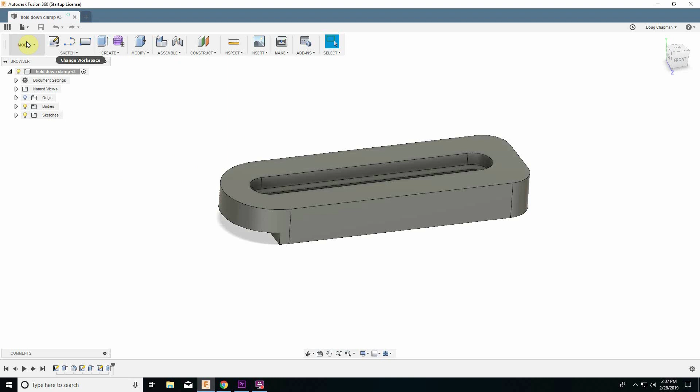So we have the 3D model, but in order to actually turn this into a real part, we need to generate the CAM toolpaths. We can do all this in Fusion 360. We did all the drawing in the model workspace, so now we want to change to manufacture. Older versions of Fusion 360 called this CAM. They've renamed it to manufacture, but it's the same thing on both.

First thing we need to do is a setup, and the setup is what sets our orientation of the part, so how it's going to be placed on the CNC table, essentially.

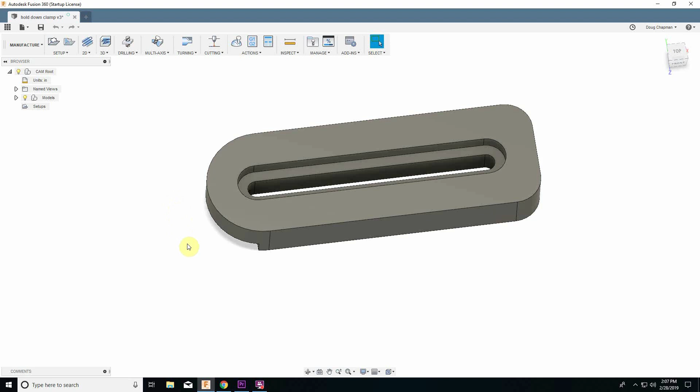As I mentioned before, part of why I chose this design for a demo is it's got the extra challenge of having to do things on two different sides. On this side, we have this recess, which is for the head of the hold down bolt. On the bottom, we have this lip, which is used for where we clamp down onto a part. So we need to do one setup with the part flipped like this, and then we'll do the finishing with it like this.

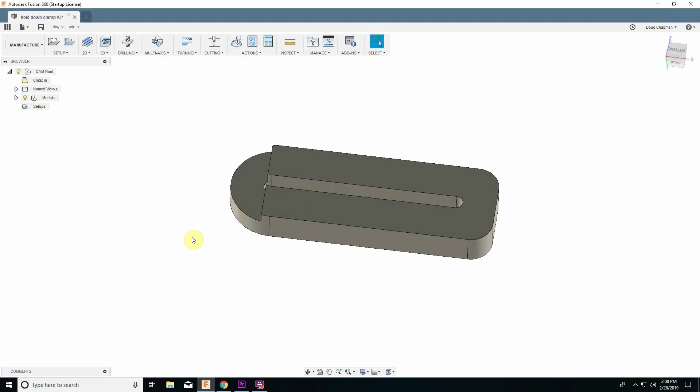So let's go ahead and do our first setup. We go setup, new setup, and the first thing we need to do is define the orientation.

So we've got our X, Y, and Z. Here you can see the Z is coming towards us. Z is up and down on the router, so that's not what we want. There's a couple different ways you can specify this, but what I usually go for, the option I find works easiest, is select X and Y axis.

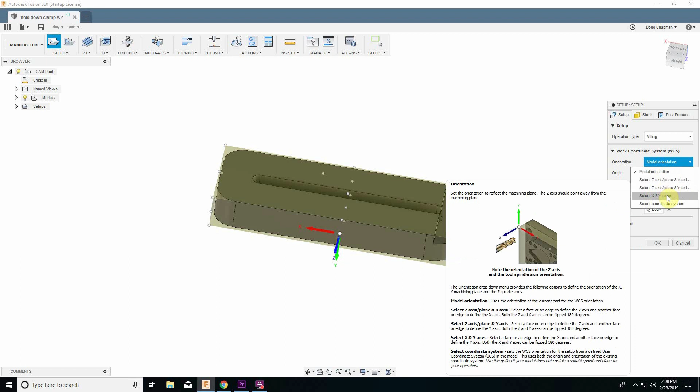Let's do that. It's asking us for the X axis, and the X axis is actually correct here. Actually, I'm going to turn it around this way just so we can see that change. Let's select this for our X, and then for the Y, we'll select this line. So now we have the X going left and right, the Y going away from us, the Z going up and down, which is what we want.

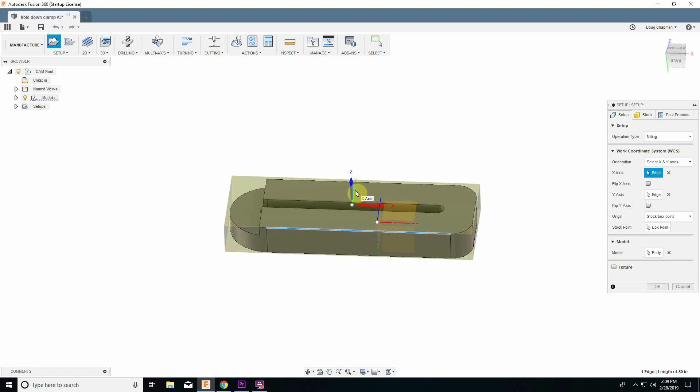Now we need to make sure we have a way we can zero this on the machine. By default, it chooses the top center as the origin point. We need something we can reference off of from our blank piece of stock. So let's click box point here, and you can see that it gives us options for bottom, middle, and top of any corner and along any side.

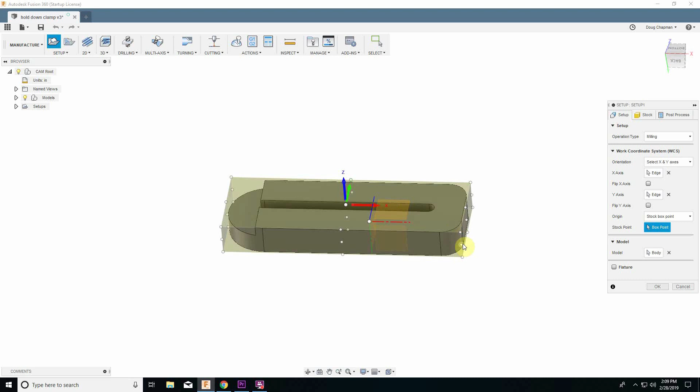So I'm going to select this lower right corner for this one, and you'll see why. Normally I use the lower left corner, but when we flip it, we'll end up using that, and you'll understand why when we do the second setup.

Now the other thing we need to do is, right now Fusion 360 tries to guess how much extra stock you're going to use, and by default it does 40 thousandths. It assumes you're going to cut this out of something that's 40 thousandths bigger on the side and on the top. What I prefer to do is, since we're doing this out of plywood and I need a way to

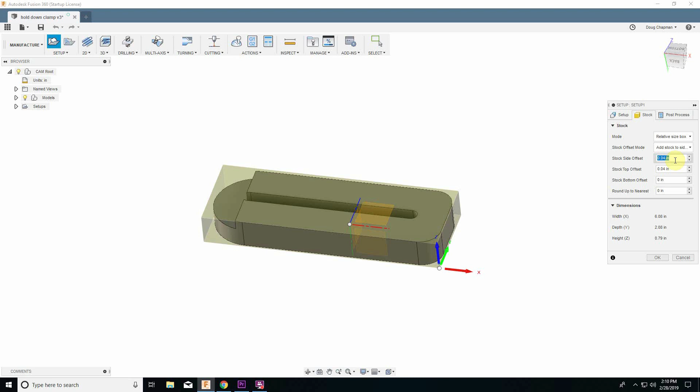clamp the piece down, I do 1 extra inch on the side, and we're going to use stock that's the same thickness of what we want to make, so we're going to set that to 0 for the stock. You'll see that this box, the shaded box, which is the piece that we're cutting it out of, is larger. So we can click OK there.

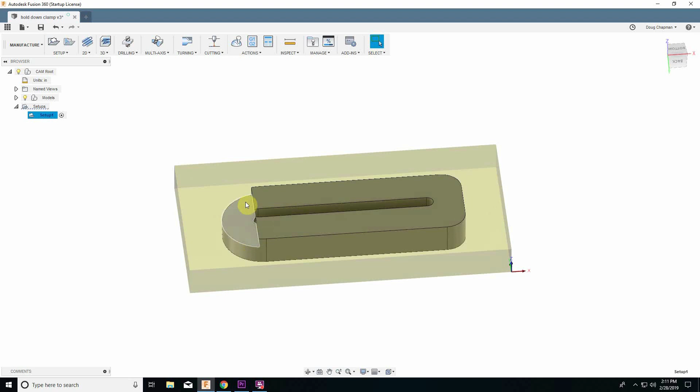Now we need to do an operation, and for this side, the only thing we really care about is cutting this piece out here. So for that, we can do a 2D pocket. First thing we need to do is we need a tool.

Right now, I'm going to assume this is your first time using this and you haven't defined any tools. I have some tools defined in my library, but it's easy enough to add one in. I'll show you how you can do that. We're going to do all these operations with a 1/4 inch spiral router bit. You can see we have various types of tools, and so first we want a milling tool.

So starting with these tabs, on the first tab you can just add some general information. These are really just notes for you. You can have things like the link to where you bought it if you need to order more of them. I tend to leave those just blank. For the cutter, this is the important stuff that you do need to define.

So we need the type of a cutter, and we're using a flat-ended end mill. It's a 2 flute, and it's less critical to enter these, but I'm going to go ahead and do this. It's a carbide, no coolant, and here's the important stuff: the actual diameters and sizes. So we're doing a 1/4 inch, which is 0.25 inches.

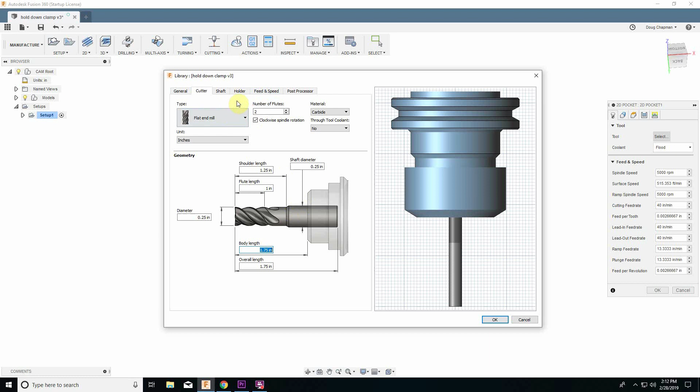The other thing that is useful on these tabs is the feed and speeds. You can define these when you actually use the tool, but here we can set some defaults. Fusion 360 does some really useful things where, especially if you have a spindle where you can control the speed through the CNC software, you can specify what speed you want and how much of a bite you want it to take for each tooth, and it'll calculate these feed rates. I'm using a normal router, so I don't have any control over it, and for doing just a simple router, you're best off just setting the feed rates.

What I find works well, and this is something you really need to experiment with your setup to see what works well, but 80 inches per minute for this cutter tends to work fairly well. So we'll do cutting, lead in, lead out - I'm going to leave those the same. The ramp by default is different, but when you're ramping in, it is good to move it a little bit slower, so I'm going to set that at 60. Once again, you can experiment with these and see what works well for you.

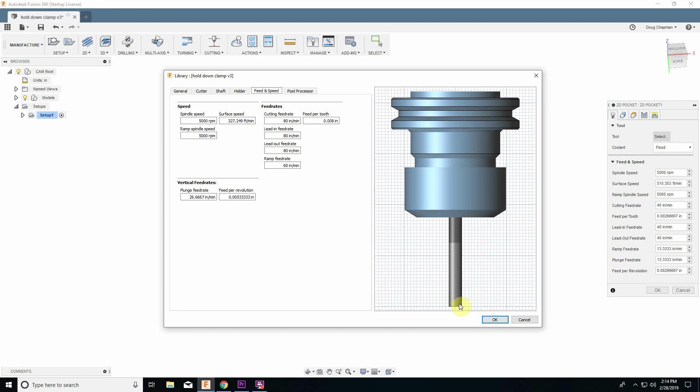But that's all we need to do to define a tool. You can see here now we have this 1/4 inch - it gave it tool number 1, 1/4 inch flat, and it gives some of the details on it. So we can click OK, and you see that that's the tool we're using here. Also, all those feeds and speeds, it'll set those values in here, so if you wanted to override them for a certain operation when you use a tool, you can define that here.

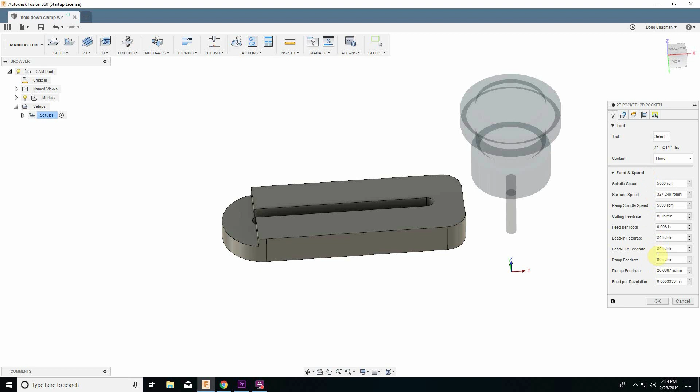So now it needs to know what are we going to cut. We're doing a 2D pocket, so we just need to define the area that we're cutting. In this case, all we care about is cutting this little lip area here, so we can select that, and it knows that's where we want to cut.

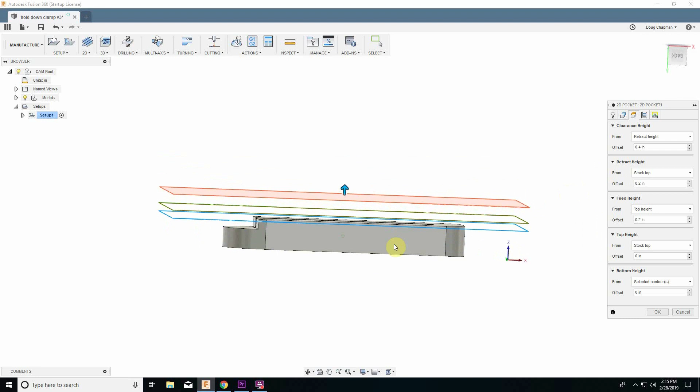For the heights, this isn't too critical, but it just shows us what we have. First of all, we have a bottom height, which is the bottom of the cut. In this case, it's not going to really show up on the diagram here because it's just selected contours, and we selected this, so this is going to be the bottom. The top height, the top of the area you're cutting, is just equal to the stock top. The feed height, which is where it's going to begin ramping in, is going to be another 2/10 of an inch, or 200 thousandths, above that.

The retract height, which probably should be what we want to do, is we want to do this from the feed height. So retract, meaning when it's going to move, it's going to pull it up to that height, and you can see the line there. Then the clearance height, which is when it does larger moves - it's a little difficult to understand exactly when it does the retract height versus the clearance height. It really comes down to how far it's moving, but you set this a little bit higher yet so that you can clear things like other clamps that are holding down the stock.

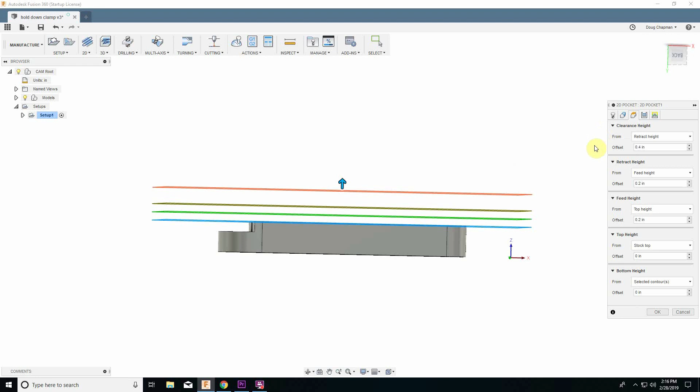Now, for passes, we don't really need to worry too much for this one - this is a fairly shallow cut, so I'm not too worried about doing this. We can do this in one operation. It's about 1/4 of an inch, and it's a 1/4 inch diameter tool, so we should be okay there. But if we did want to do that in multiple passes, we could use this multiple depths tab, and I'll show you that when we do the thing on the other side, so we'll leave that.

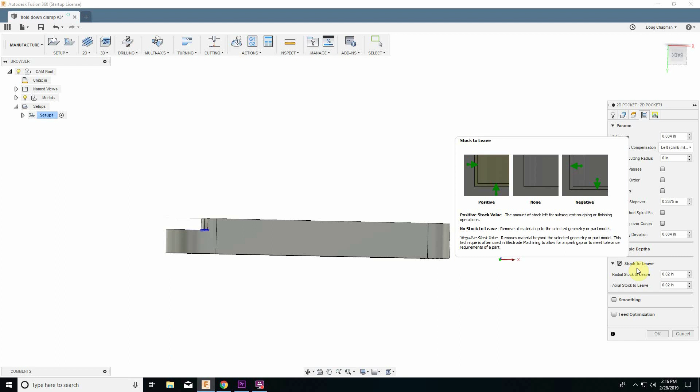Now the other thing is, by default, it's trying to do a stock to leave. The 2D pocket, and also 2D adaptive, or same thing with 3D - the adaptive and the pocket operations are not intended to be extremely precise operations. They're intended to remove the bulk of the stock, and if you're doing something where you need the part to be very precise, what you do is you leave a little bit of stock here.

Here you can see it's leaving 20 thousandths of an inch, both radially, meaning around the outside of the tool, and axially, meaning along the end of the tool. So it would leave a little bit of stock, and then you would do another contour operation, which is much more precise, to remove just that little bit that's left.

We're not worried about this being that precise, so I'm going to leave that unchecked so we don't need to do that extra operation. And then on linking, about the only thing I care about changing for this operation is this 2-degree helix, which is a little shallow. For plywood, I tend to make that 10 degrees.

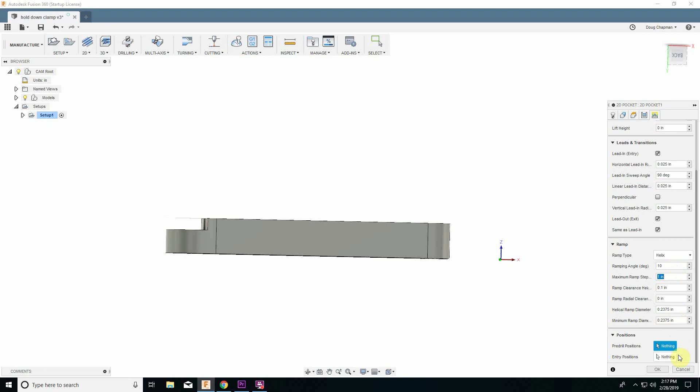If we click OK here, you can see that it did our tool path. This blue line is when it's actually cutting, and it'll remove all the area that is this lip. So that's all we need to do for the first setup.

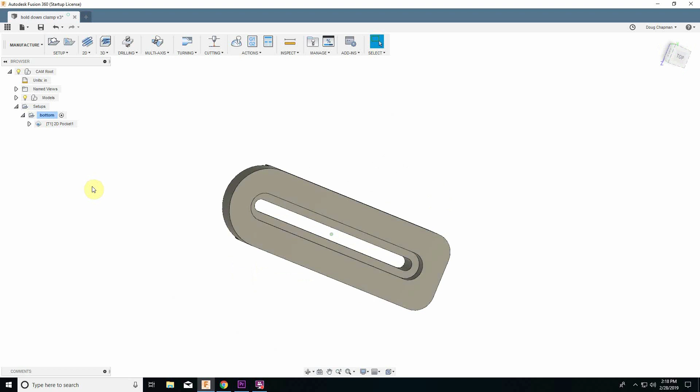Now, just to keep things straight, I'm going to rename this setup to be 'bottom,' just to give it a name. And now what we need to do is flip it upside down and do the top side.

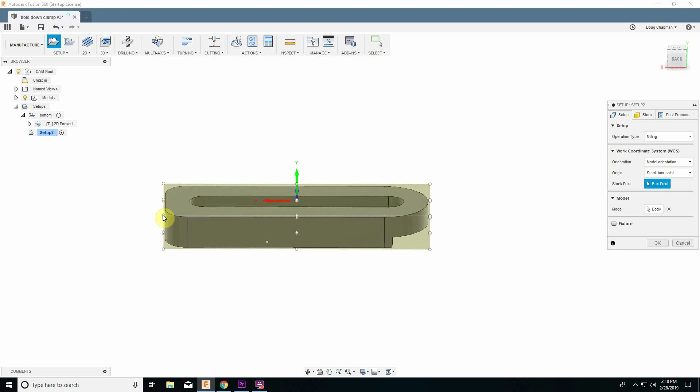First, let's remember that we used the lower right-hand corner for our zero point on this operation. We need to remember that because when we do our new setup, we're going to flip it over. So now that corner is over here, and I still want to do it along the bottom, so I'm going to go ahead and select that origin point right here.

Now our X, Y, and Z are still not correct, so just like we did before, I'm going to select X and Y. We want this to be our X and this to be our Y. And frustratingly, it always moves the origin around, so you really need to save that for last. Let's reselect our origin.

Now our Z is upside down. X and Y are in the right plane, but notice how the Y is pointing towards us, not away from us, and because of that, it's causing the Z to point down instead of up. So to fix that, we can just flip the Y-axis, which moves the origin again. I still find that rather frustrating, so let's move it back to where we want.

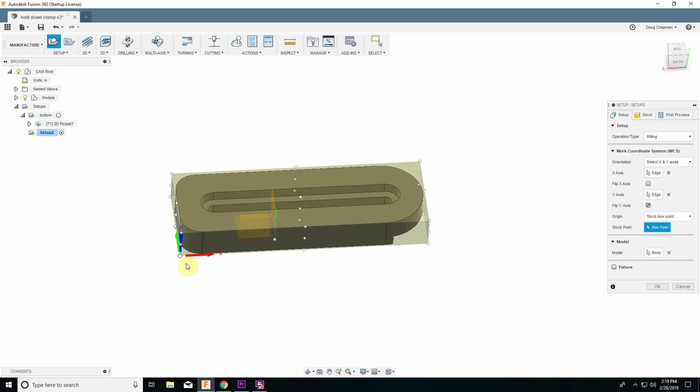But now we've got what we want: X going left and right, Y pointing away from us, and Z pointing straight up.

The other thing we need to make sure is consistent across our two setups is the amount of side offset that we had. We had 1 inch before, we still need that now, and we're going to do 0 on the top.

Now, I didn't talk much about why I chose the bottom corner rather than the top corner, and different people prefer to do this different ways. I've found that this works better for me.

What I can do is zero out my Z height on the router as being right at the table, and then when I do the cutout, I know, even if I haven't measured the thickness of the stock quite correctly, I'm not going to gouge into the table, and I'm going to cut all the way through the part properly. So that works well for me.

So earlier we did a 2D contour on the bottom. We're going to do the same thing, or sorry, not contour, the 2D pocket. On this one, since we have a more complex shape, I'm going to change that to a 3D. It's hard to explain exactly the difference between the 2D and 3D operations, but essentially a 2D operation is a much more simplistic algorithm where you just give it the area and the depth you want it to cut, and it essentially does things along one plane.

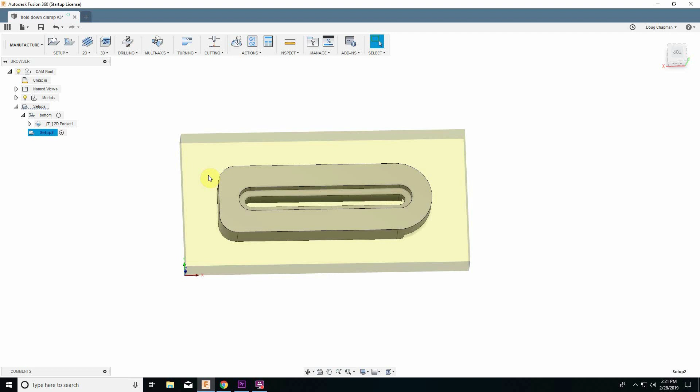What we care about here is doing this recess and the inner slot in one operation. So if we do a 3D pocket, once again we want to verify we have the right tool, and we're going to do this all with that 1/4 inch end mill, so that is correct. We're not going to change any of our feeds and speeds.

Now here, we do need to change it. If we don't set any of the geometry, it's going to try to do everything it can in one operation, which would mean removing all the stock around the outside, that extra inch all the way around. It would mill all of that away and probably try to face off the top to flatten it, which we don't need because we're already using a flat piece of plywood, and then it would do the inner part.

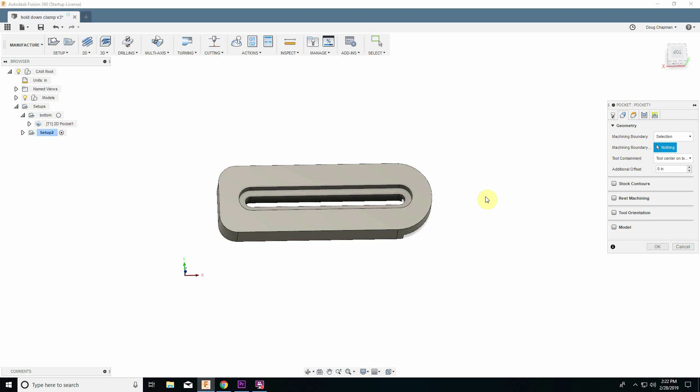What we care about is just that inner part. So we can go selection for the machining boundary, and we can just select this oval, and we want tool center either on or outside. If we do tool center inside boundary, it tends to not actually get the whole thing. But if we do tool center on boundary, meaning never let the tool go any farther than the center on that boundary, that should get everything we want.

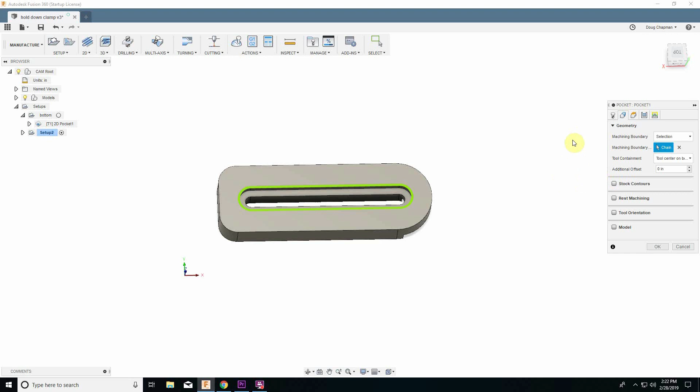And we'll check the tool paths before we finish up here. Once again on the heights, now we'll see something a little different than we saw with the 2D. On this one, it does know where the bottom is, because we didn't just select a contour for it to cut. We're actually saying don't cut anything below this. And so any place within that area that it can cut all the way to the bottom, it will.

And we're going to do the same thing for all of the other clearance heights. Except for I wanted this. Yeah, no, this is correct.

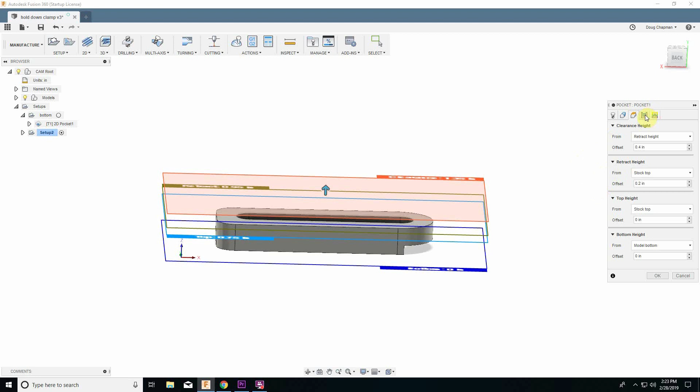And once again, for passes, we don't want to leave any stock because we don't need this to be super precise. So I'm going to uncheck that again.

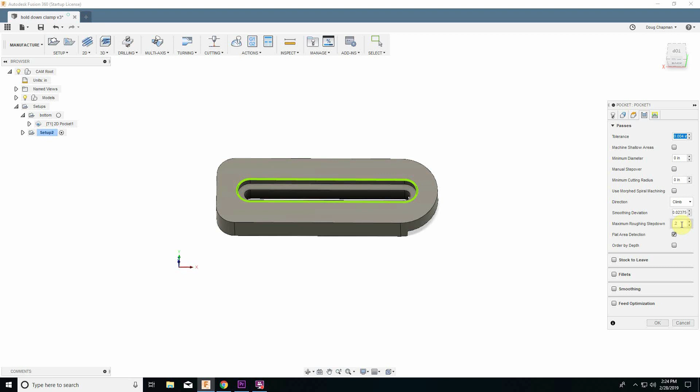But now we don't want it to try to do this full depth as one cut. So I am going to go here in the passes, and we are going to say here where it says maximum roughing step down. By default, it's 40 thousandths. That's really based more on doing things in metal for these defaults. So a good guideline, especially when doing wood, and really for most things, is you never want to cut any more depth than 1 time the diameter of the tool. So this is a 1/4 inch tool. I'm going to be a little bit conservative and just do 0.2 inches for the maximum roughing step down. So that should be a pretty good, fairly conservative depth to cut.

Now once again on the ramp, I'm going to change this to 10 degrees, and the rest of this should be good. So now we'll get a little more complex tool path on this because we're doing a more complex operation. So let's take a closer look at this.

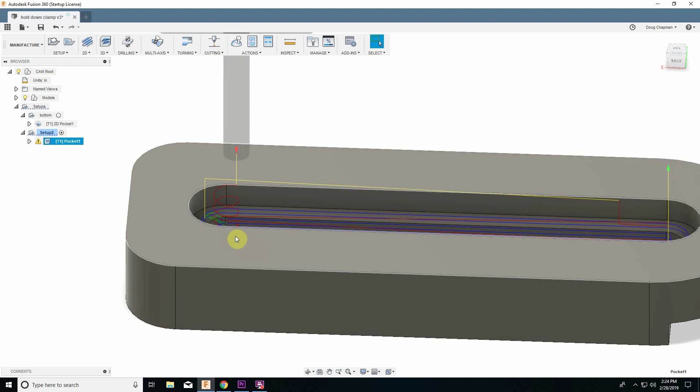First of all, you can see this. You can see it helixing down. The reason it does that rather than plunging is router bits and end mills tend to cut better on the edge and don't cut really well in the center. So by doing this, you're not relying on the center of the tool to cut, because it's a router bit. It's not a drill bit. It's not really intended to just plunge straight down.

So it does this circular motion to get down there, and then it does some. You can see it clearing out this upper area here. And if we flip it around to the bottom, you can see that that tool path then gets a little narrower and goes all the way to the bottom. So that looks like it's going to do what we want.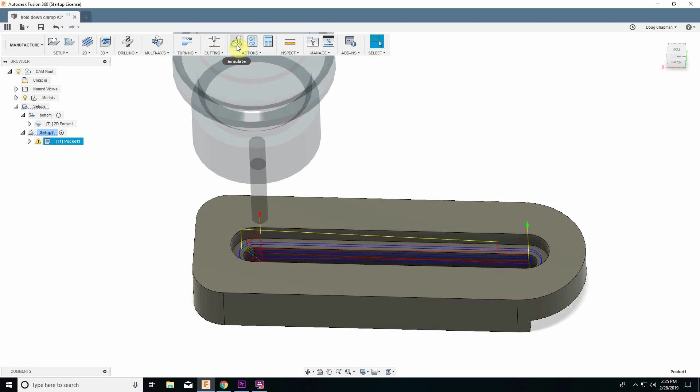But just to be sure, what we can do is we can simulate this. So the simulate button, and what we want to do is we want to turn on the stock button so we can see what it is we're cutting. And I'm actually going to turn off the tool path. But this will show us the actual operation in simulation of what it's going to do.

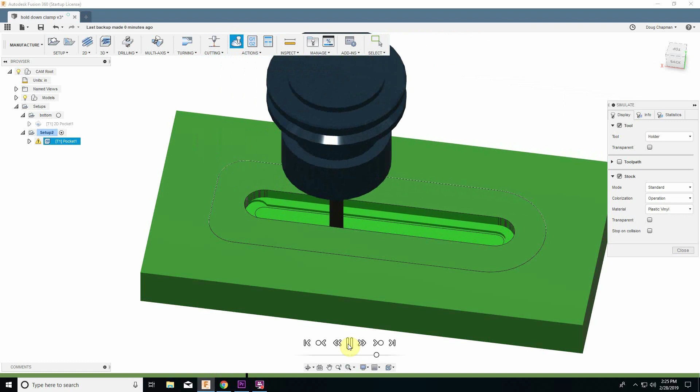So this is a useful thing to do. Make sure it looks like it's doing what you expected. A lot easier to fix it now than have it do something you really didn't want on the real part.

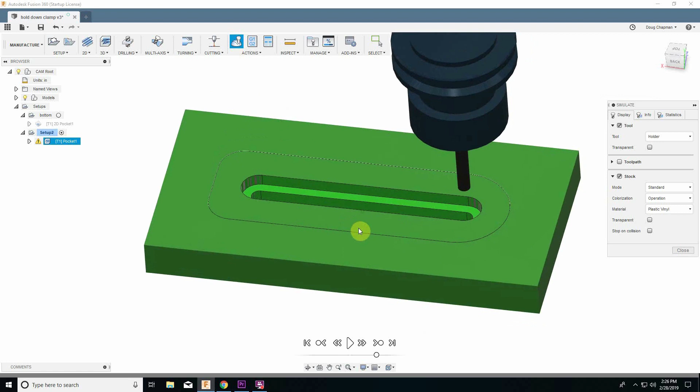And for this, once we think we're happy with what it's doing, we can click this button, which will jump clear to the end. And we can see what results. We see that it did cut all the way through. That's a useful thing. Sometimes if you don't have your height set up correctly, it won't cut all the way through. But that goes all the way through, and I think everything looks good. So I think that tool path is good.

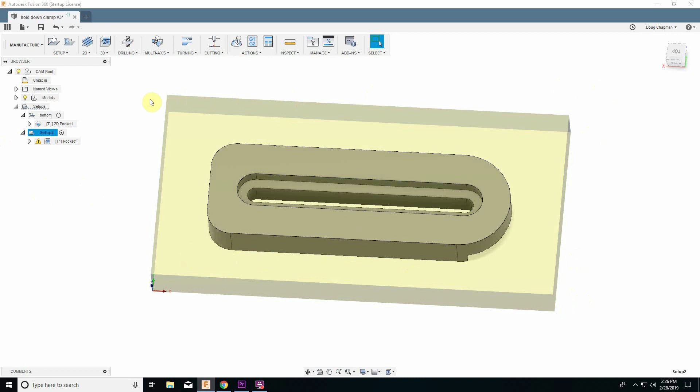So now the last thing we need to do is actually cut this out of the stock. As I mentioned, we could do something like that adaptive, that 3D adaptive would have done it, but it would have removed all of this stock. Of course, that would be a problem because ideally we've got this clamped down, around these outer edges. We've got something holding it down, so we can't just remove all that because we've got clamps in the way, and the part, once it broke free, it would just kind of go flying.

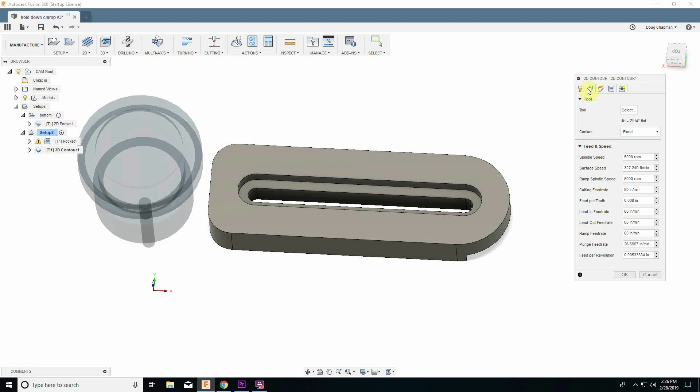So what we're going to do is we're going to actually cut this out, and to do that, we can do a 2D contour. And so what this is going to do, we've got a very similar dialogue here where we verify we've got the right tool. That's correct. And now for the geometry, what we want it to do is we want to tell it to cut along here along the bottom.

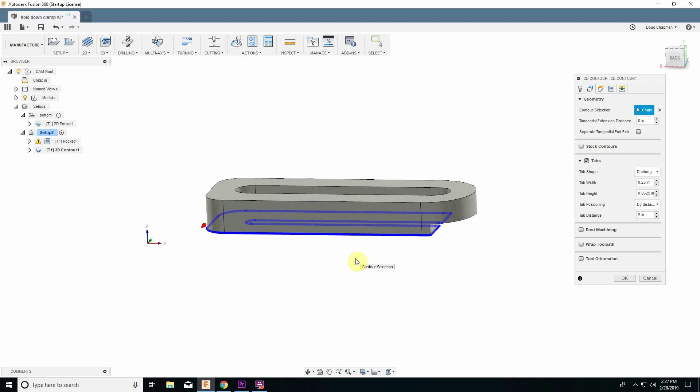Now, if we didn't have this notch here, we could just select this line. However, that line does not go around the whole thing, so that's not what we're going to want. And 2D paths are fairly dumb.

It will cut right through parts of your model if you tell it to do something like that. So instead, let's click on this oval, which gives us the shape but not the proper height or depth of where it's going to cut down to. We can fix that on our heights tab. The other thing we want to do is make sure that when it cuts through, this piece doesn't come free, so we can tell it to leave tabs.

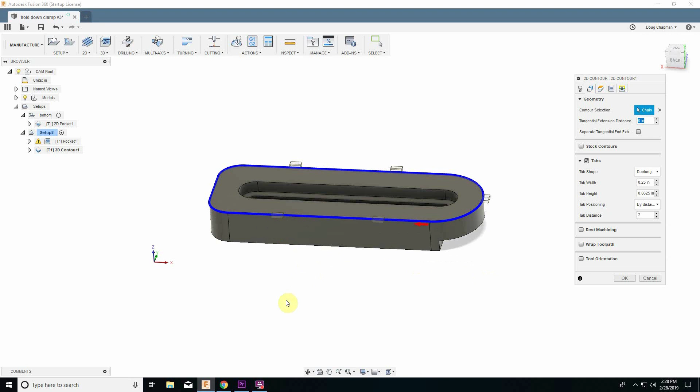I have this set from a previous job at 5 inches, but this piece is much smaller than that. So let's tell it to do every 2 inches. For now, ignore that it's putting the tabs on the top - that's because we haven't set the height yet, but you get an idea of where it's going to put them. It's going to put 2 tabs on each side, which should be good, and one here on the nose. When we move this line down to the bottom, that one isn't connected to anything, so it's not really useful, but these other 4 should be plenty.

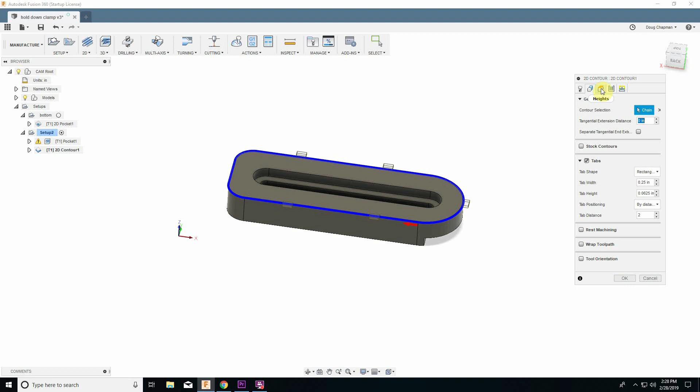So now on the heights - this is where, before when we did a 2D operation on our original operation, we just said the bottom height is the selected contours. If we do that now, this isn't going to cut anything. It's literally just going to follow around above here, cutting air and maybe slightly rubbing against the part, because this top part of the model is what we selected as our contour.

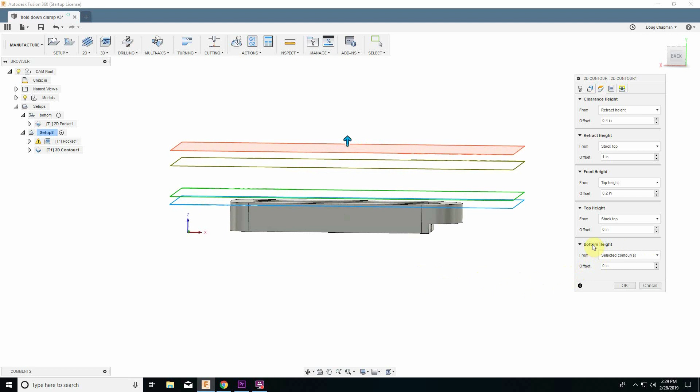So for bottom height, instead of selected contour, we can do either model bottom or stock bottom - they're the same in this situation. Let's say model bottom, and now you can see it's moved that down. It's going to try to do that contour - we've defined the shape on the previous screen, but now we've defined the depth here. We'll leave these other heights the same; they should be fine.

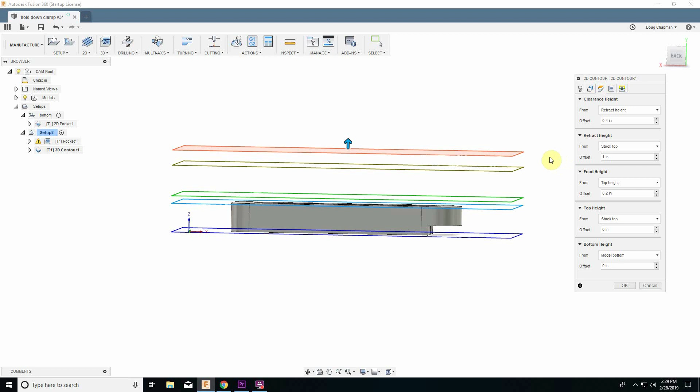Now on passes, this is slightly different because it's 2D. When we did the 3D and didn't want to cut all the way through, there was a maximum roughing step down. For the 2D operation, there's this multiple depths tab, which didn't even show up before. This is probably where you want to set how deep you want to go. The maximum roughing step down once again defaults to 40 thousandths of an inch.

We can do much more than that - once again we'll do 0.2 inches, which should be fine for our 1/4 inch depth. Stock to leave is not checked, which is good - we want this to just do the full cutout.

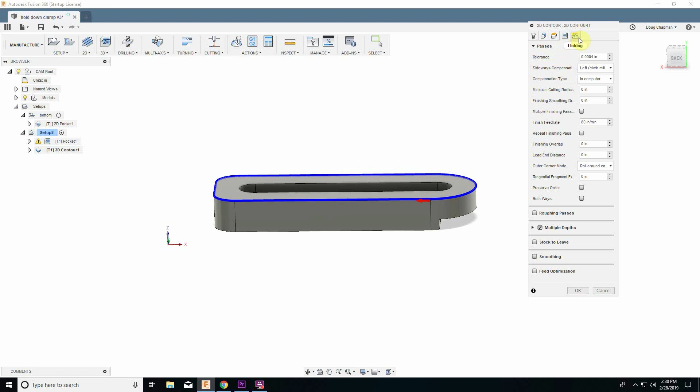Now if we go down here to the linking, for the 2D contour, especially when cutting things out, one thing I like to uncheck is this lead out. If you leave lead out checked, when it's done it's going to try to pull the router straight away from the part wherever it happens to finish, and then up. By pulling it straight away, it's actually going to gouge into the stock you left around the outside that you didn't cut. So if we turn the lead out off, it'll just pull straight up, which I find works much better.

Also, we want to make sure we do ramp in. Instead of doing a helix ramp or a contour, we'll just do a ramp where it follows along the path of the contour, just down at an angle. Once again, for plywood, I find that 10 degrees is much quicker and works just fine.

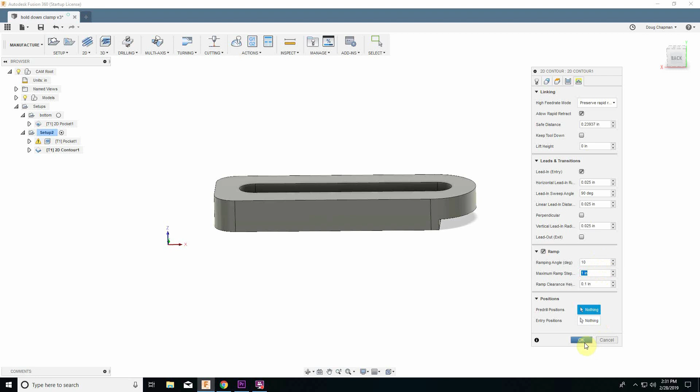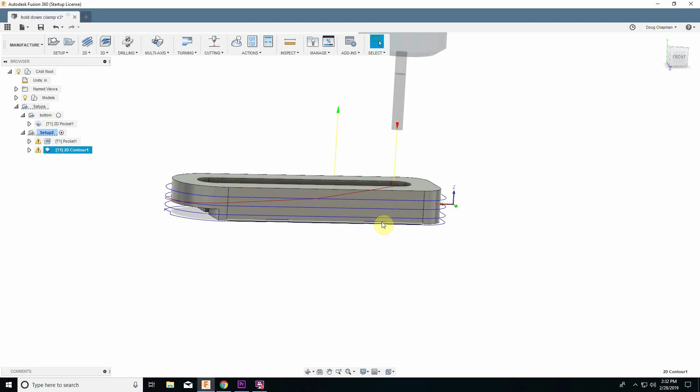So now we can click OK and take a look at our tool paths. Let's turn this around to where it started. First, you can see the ramp I mentioned coming in at that 10-degree angle, and then it follows this blue line, which is 0.2 inches from the top. It goes all the way around once, ramps down again, goes all the way around, and then finally on this bottom pass you can see it lifting up the tool to leave these tabs.

And you can see here it's trying to leave a tab that won't be connected anyway, but the other 4 tabs should be plenty for that.

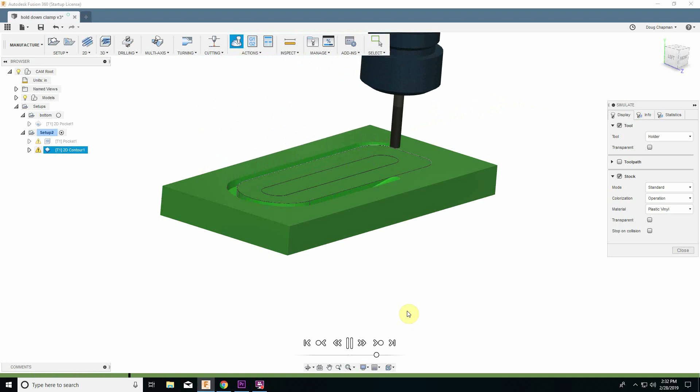So once again, just to make sure things look right, I'm going to click Simulate. Now we're just simulating this 2D contour, so you won't see it do that middle part. But you can see it ramping in, going all the way around, and ramping in each time around, and I'm going to just jump straight to the end.

And if we look at this from the top, you can see that it did cut all the way out, and it did leave our tabs, so that all looks good.

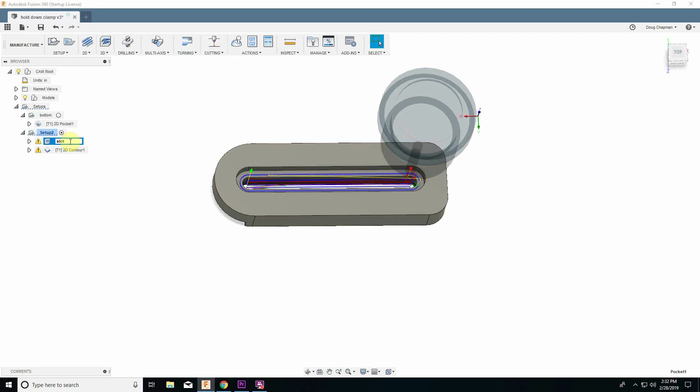Now, just to make this a little more obvious, I'm going to change this one to slot, just so we have a name of what it is. If you double click on it, it edits it. If you click and then wait a second, then click again, then it lets you change the name. So, and then this is the cutout operation.

And I'm going to name this one bottom. And this setup, I'm going to call top. So, we should have everything we need to cut it out.

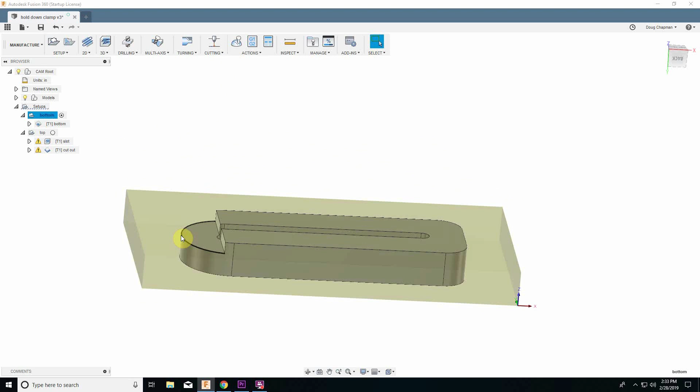What we'll do, just to quickly review, first we're going to have it flipped this way, and it's going to remove just this portion. Then we're going to unclamp it, and re-zero the tool on this point after we flip it over, which is now over here. It's the same corner. Then we're going to remove all the slot, including the countersink, and then we'll do the second operation, which cuts it out.

So now what we need to do is we need to actually generate the G code that gets sent to the CNC router. So starting with the bottom, if you right click and post process, first of all, make sure you have the appropriate processor set from this list.

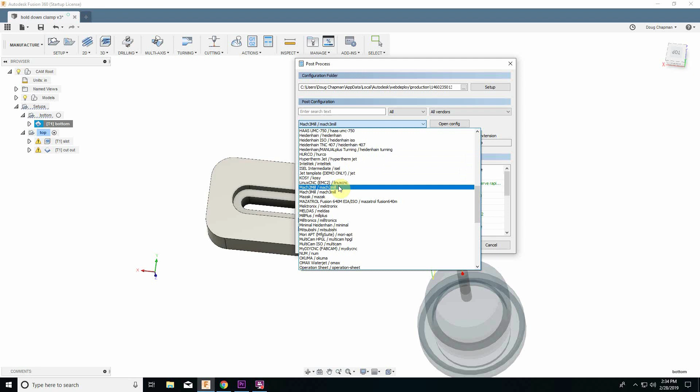So there's a lot of options here. It depends on what software you're running. Mach 3 is what I'm using. It's a fairly common one. That may be what you're using. So if so, Mach 3 Mill is what you want.

I ignore the output folder. I just leave that set to whatever it is by default because I end up saving it someplace else. For the program name or number, it defaults to a number because there's some CNC machines that can only take a number because they'll display that on the screen. But what I'm going to do is I'm going to call this bottom.

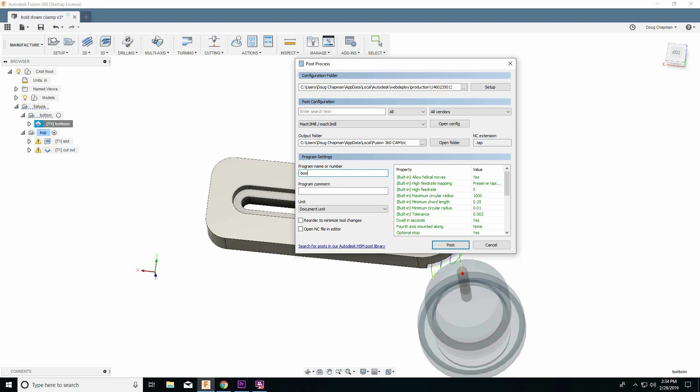And we will post-process that. Now, it asks me where do I want to save it. So here you can save it to a USB stick. More than likely, I'm assuming you're using one computer for doing your CAD work where you're running Fusion 360, and another computer that actually drives the CNC.

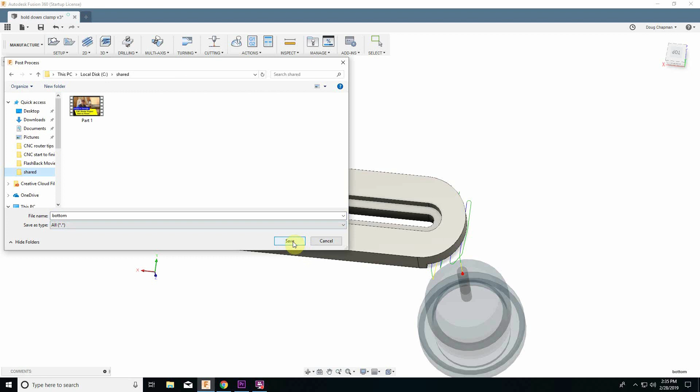So the way I do it is I put it in a shared folder. So I'm saving that, and that's network mounted to my other system. You may want to put it on a USB stick or wherever, but that's entirely up to you. Whatever you need to do to get that file to the other CNC machine.

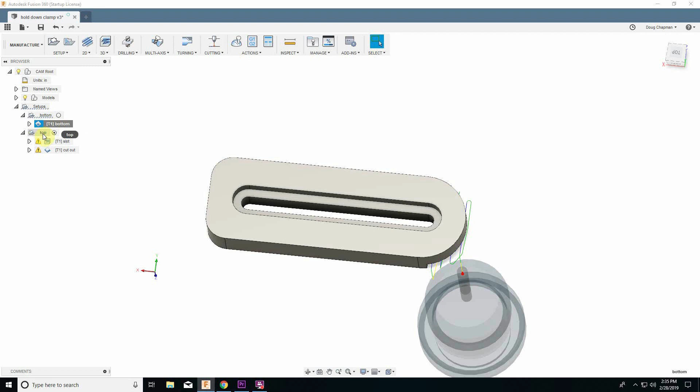Now, for that, there was only one tool path for that operation, so that was easy enough. For the top, where we have two separate operations, there's a couple ways we can do this. We can either post-process the setup, right click on top and generate it, and that'll generate one G code file that does all of those operations, the slot and the cutout, without stopping in between.

What I prefer to do though is do these individually. That allows me, it makes it a lot easier to restart it. It means a little more work when you're running it because after the first one finishes, you do need to load the other one into your CNC program. But I find that works. It makes it much easier if I need to restart things, like if a bit breaks, for example.

And so maybe I've cut all the inside out, and then in the process of doing the outer cutout, the bit breaks. Well, I don't want it to run through all this inner part again. If I replace the bit and re-zero things, I should be able to just rerun the cutout program.

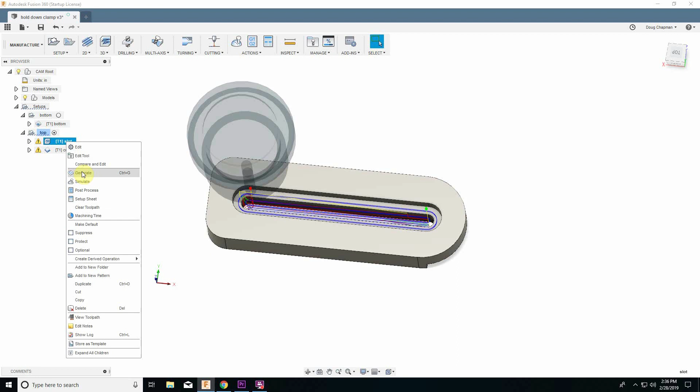So I'm going to do this as two separate things, but same thing, where we do post-process, give it a name, and tell it where we want to save it. And same thing here.